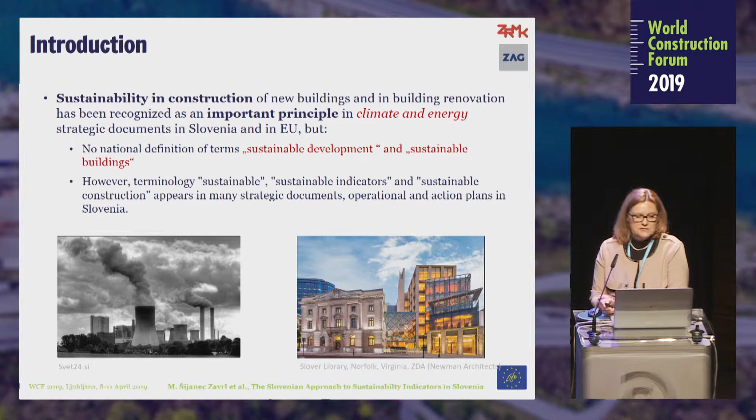Sustainability in construction of new buildings, as well as in building renovation, was recognized as an important principle in the frame of climate and energy strategic documents in Slovenia and also at the European level. Everywhere you can find the term sustainable development, sustainable building, sustainable assessment, criteria, and so on. These kind of statements are listed, for instance, in our operational and action plans on energy efficiency and mitigation of climate change.

For instance, in Slovenia, there was a governmental decree that required the ministry responsible for environment and building regulation to develop the environmental requirements for design and construction of buildings, in order that by implementing those requirements, the entire life cycle can be considered. We also have an operational plan for using European cohesion funding, and there it is stated that the buildings which are supposed to be renovated in line with sustainability criteria are given funding priority.

Then, if you look into the long-term building renovation strategy, there is also quoted the rule that the projects which reflect the compliance with sustainability guidelines may be given a priority for funding. As well, in the greenhouse gas mitigation plan, there is policy presented by which we have to take care for mitigation of greenhouse gases in buildings, and that we have to take care for materials with lower emissions. And finally, the state committed to develop the sustainable indicators for buildings.

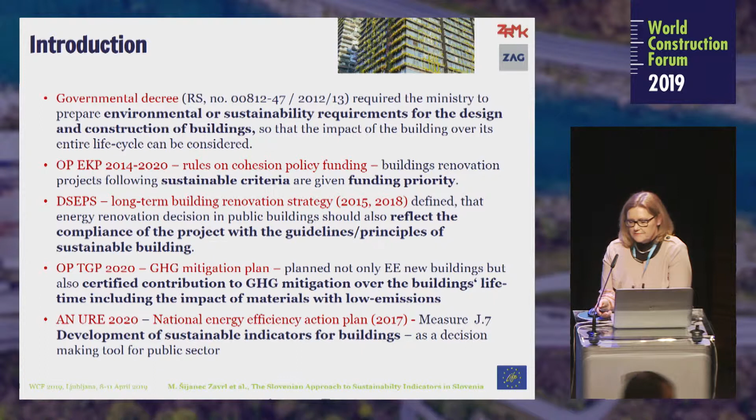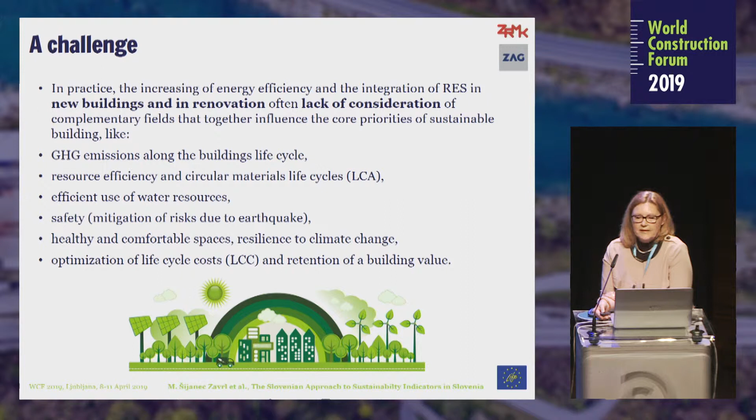And what is the challenge? In practice, the increasing of energy efficiency and the increasing of renewable energy sources in new buildings and renovation often lack consideration of other fields that are very close to sustainable building, like greenhouse gas emissions, resource efficiency, circular materials life cycle, efficient use of water resources, healthy and comfortable spaces, better safety due to mitigation of earthquake risks, life cycle costing, value of building over the lifetime. These are the issues that have to be considered when we are planning new buildings or renovation.

Currently, we have the decree on green public procurement. This decree in Slovenia imposes the requirement for the use of at least 30% of wood or wood products. And 10% of this volume share of materials may be substituted by construction products which have environmental labels. But still, this kind of requirement seems very strict and quite binding for some architectural solutions.

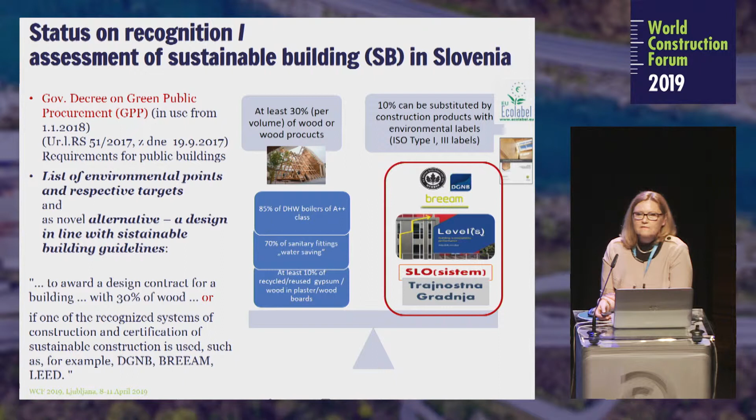Therefore, the governmental decree, which is valid from the 1st of January 2018, foresees an alternative solution, and the rule of 30% of wood can be substituted if the design and construction of the building is made according to the rules of one of the recognized certification schemes for sustainable construction, as stated in the decree, like DGNB, BREEAM, LEED, or similar. The question is, what are the country-specific and relevant characteristics for sustainable building that can be used in Slovenia?

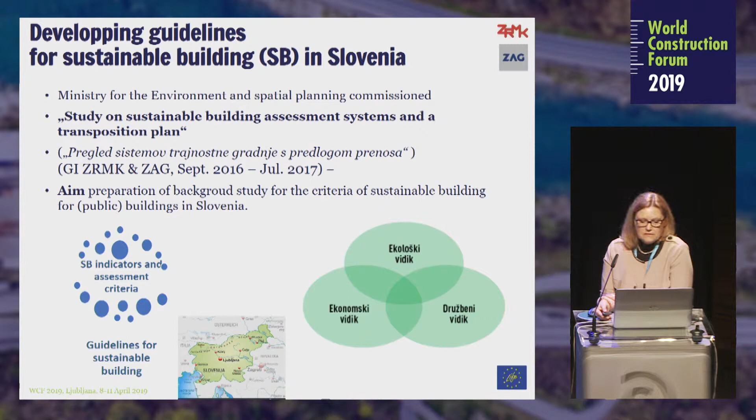To respond to this challenge, the Ministry of Environment commissioned a study on sustainable building assessment system and transposition plan. This study was implemented by ZRMK Institute and by National Institute for Building and Civil Engineering in the years 2016 and 2017. The indicators and guidelines initiated in this study covered economic, ecological, and social areas of sustainable building.

Just to mention a little bit about the status quo in assessment of building sustainability. We have internationally recognized market-driven assessment systems. I already mentioned them, LEED, BREEAM, DGNB, and maybe some other as well. It seems like a temptation to take over such a system and use it in a small country like Slovenia.

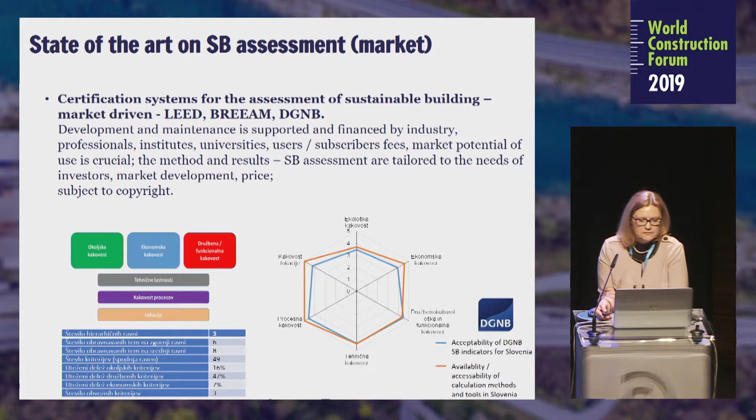But in reality, every system which operates well in some big market, like the German or Central European market, has behind it a strong industry supporting it, a lot of research, a lot of professionals, and it just doesn't work that you take something, adapt it a little bit, and hope to use it in a small country. And again, the European Commission committed itself to streamline sustainable building assessment systems across Europe. That's why the Joint Research Centre prepared a study, development of a framework for core indicators for assessment of environmental performance of buildings.

And this study focused on the implementation of European policies on resource-efficient Europe and circular economy, as much as these are related to the building sector. A result of this study, at the end of 2017, I suppose, was an alpha version of 14 indicators

published under the trademark Levels. So this is a European challenge on how to consider building sustainability, but I have to say that this is more or less a framework and not very concrete indicators with some databases, calculation methods, and so on. So it's a guideline that gives useful information on how to adapt it on a national level.

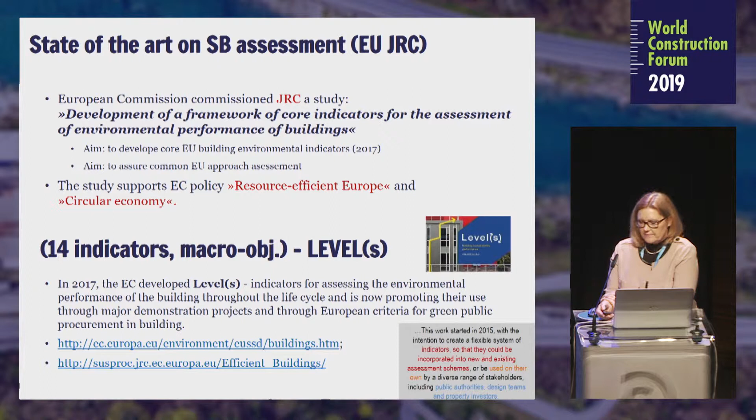If I go back to the national study, what we did in Slovenia is that we analyzed the most popular systems for assessment of building sustainability. That means that we analyzed over 300 individual indicators in more than 6 certification schemes and approximately 650 sub-indicators.

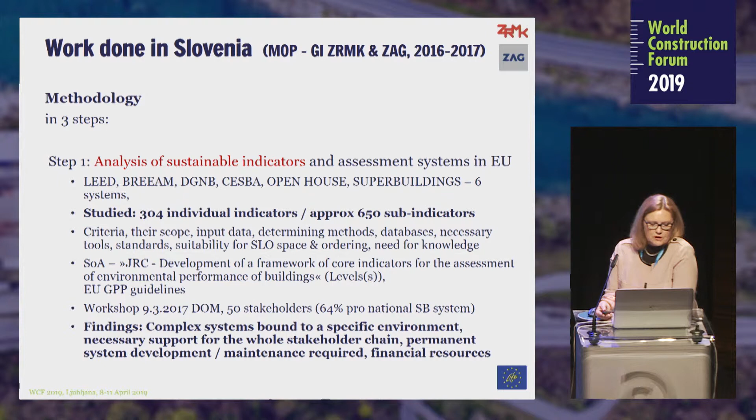We finally came out with a solution which indicators are appropriate for Slovenian situations and which are either not relevant or are much too complex. The next step in the study was to test or to see how Slovenian national regulation in the building sector and how the engineering practice in this field corresponds to the most relevant and the most important indicators.

Indicators are applicable if you can find the data for their values in engineering design. Otherwise, it's too complex, too time-consuming, or too expensive to evaluate such technical data. What we found out is that only about 1/3 of the selected indicators of sustainable buildings are at the moment adequately addressed by Slovenian building codes.

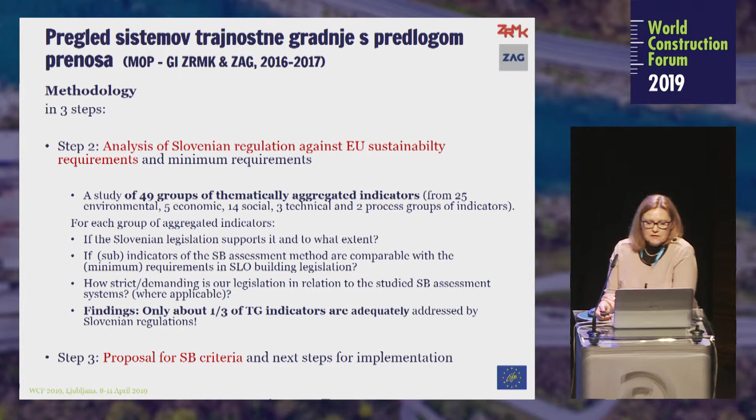Which indicators? For instance, we don't have any regulation on LCA analysis, we don't have any regulation on environmental impact of materials and products. On the other hand, we have a lot of regulation on thermal comfort, indoor air quality, quality of thermal envelope, and a little bit on simplicity of removal of construction components and recycling.

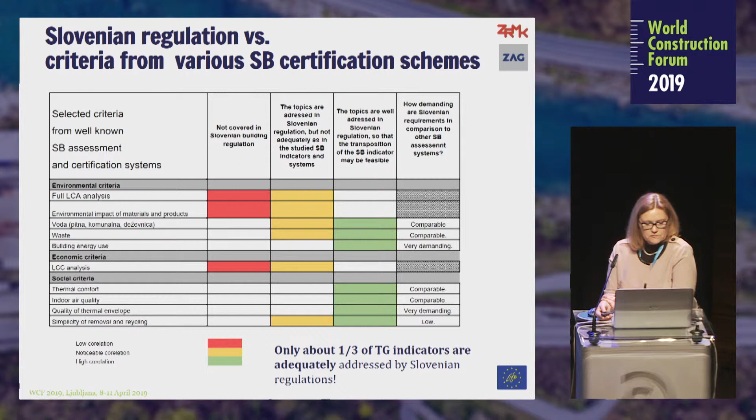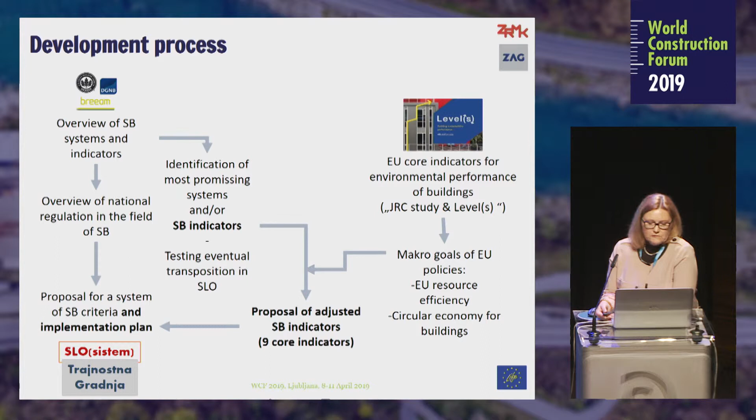What we did is that we, as I said, analyzed available indicators, which can be found in different certification schemes. We considered the European way of tackling building sustainability, and we ended up with a proposal for 9 core indicators as a beginning of a Slovenian scheme. These are the indicators with some sub-indicators, but I will just read some

core titles of indicators, like total primary energy over the building life cycle, full LCA analysis, planning of building service life, decomposition and recyclability, construction and decomposition waste, use of water during the building operation, indoor air quality, risk of overheating, because climate change is a problem, and also the life cycle costing of the building concept. So these are considered as the core indicators.

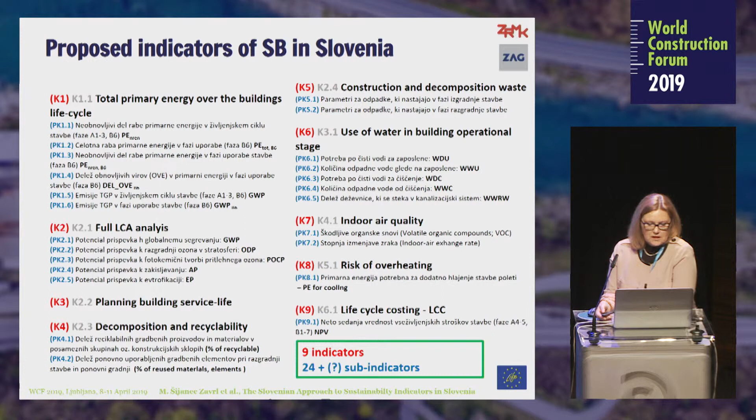Which areas are covered by these indicators? To some extent, some elements that are already addressed by the building codes are also considered in sustainability assessment, but only those areas where it is reasonable to consider that an improved level of requirements would contribute to building sustainability. On the other hand, the majority of indicators cover the issues of so-called public good. The state has to take care of the public good in the construction sector.

And the indicators addressing public good are the indicators related to resource efficiency, circular economy, energy efficiency, mitigation of greenhouse gases. What is not considered at the moment are so-called indicators that are relevant for market priority of particular investments, the indicators that are interesting for real estate agents, for developers, for the simple reason that they are not considered as a public good.

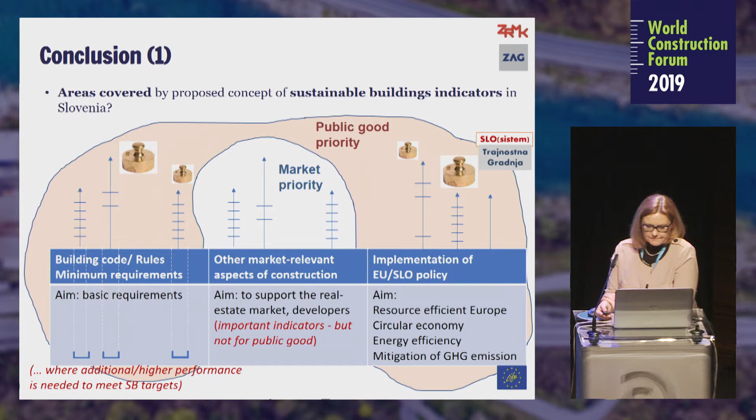Where are we now with development of the national systems? We are somewhere at the stage of agreement on the most appropriate concept of sustainable building assessment. Next step will be developing the alpha prototype, testing it, and so on, all the way through the voluntary.

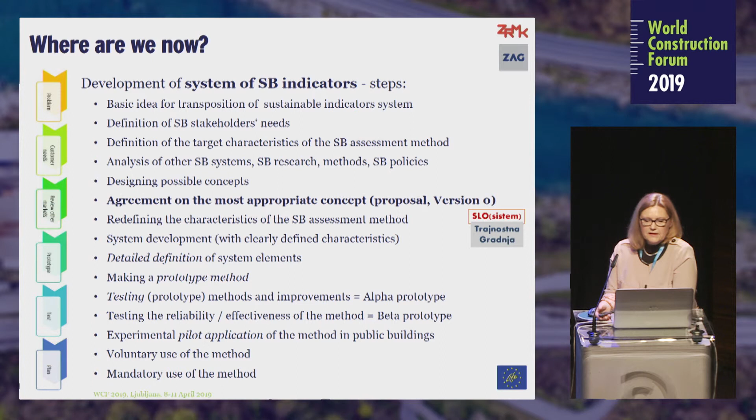If you could wrap up your presentation, please. Yes, and this is my last slide. Time.

The next steps in the development of the building sustainability system in Slovenia will take place under the umbrella of the LIFE Integrated Project Care for Climate, led by the Ministry of Environment and Spatial Planning. And in the next 2 years, we are planning to develop the alpha version set of sustainability indicators and test them on the first case studies.